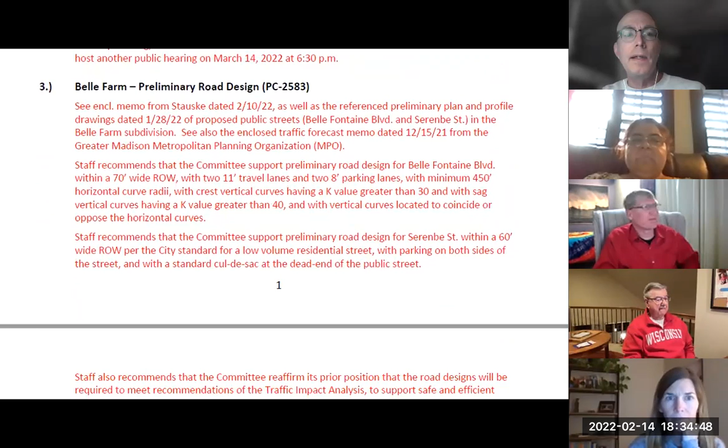So then we've got next up, Belle Farm, some discussion for the preliminary road design, and we have a preliminary road design, so that's good news. I see that we have the developer, Kathleen, is with us tonight. I don't see Kathleen, is Bruce here? Oh, there I see Bruce. Here I am, never mind. I was scanning the list and missed you, Bruce. Can you hear me okay? Yep, you're coming through just fine.

So you've all seen the drawings and you've seen my memo. I don't know if you want me to jump to anything. I have a few recommendations embedded in here, and we could talk about the roads one at a time. If there are any general questions, that would be fine too.

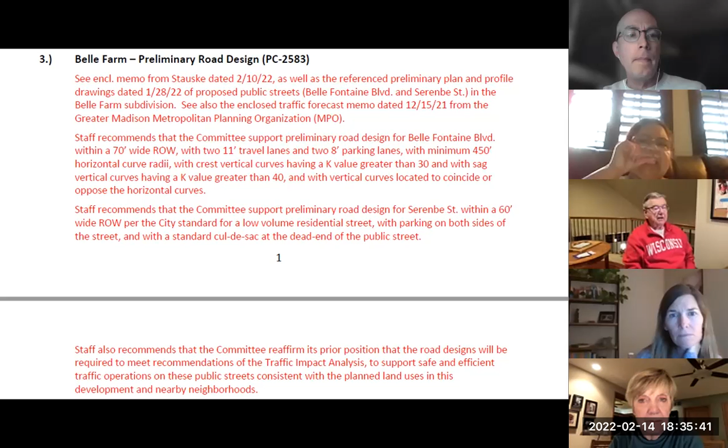All right, well, I think, Sean, do you want to maybe summarize what the design is with respect to Belle Fontaine first, and then we'll do Serenbe second, and then talk about the other question that you had raised as well. Sure.

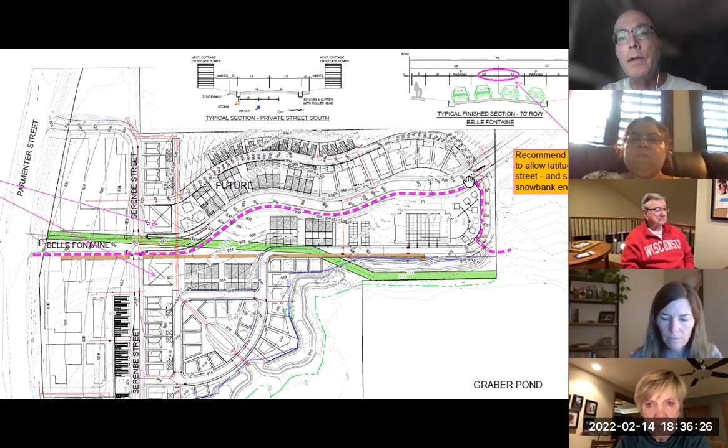I'm just trying to figure out, maybe I'll just stay here on this overview for a bit, even though it'd be nice to maybe be able to see it better. Let me try zooming in just a bit. Okay, well, you can see, if nothing else, on your screens this dashed purple line, that's the multi-use path that would be on the south edge of proposed Belle Fontaine Boulevard.

Susan, were you asking a question about this green line before the meeting started? That's the sanitary sewer interceptor that cuts through the site. And then it links up with one in Misty Valley? It's already there, this is just the easement. That's what I wanted to know. Okay, so the road design, maybe going down to a typical section for that would be a good way to start, if nothing else.

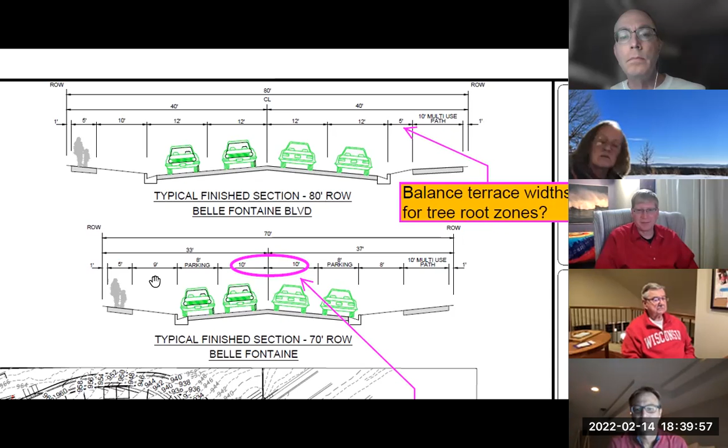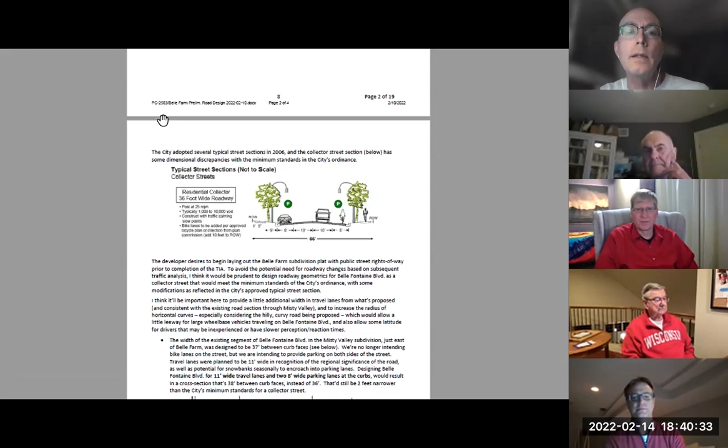My question is, in your memo, you say that the standard for a neighborhood collector street is 80 foot. Why are we doing 70? So there's the ordinance, 80 foot, and then there are 2 levels of planning documents that we have, and it confuses me too. We have an ordinance that's quite a bit older than what the city adopted for typical road sections. So the city's ordinance still refers to this older 80-foot right of way. Let me zoom in on this piece now.

So Sean, this would be more like the retail area in Middleton Hills, in terms of... I didn't look at that, to be honest with you.

So this is the 80-foot you're talking about, Carl, for a collector standard. It has this 40-foot width from face of curb to face of curb, or 36 feet of asphalt plus 2 feet plus 2 feet of the gutter itself. That roadway standard was also adopted in ordinance, but the council also adopted typical street cross sections, which are different than the ordinance. I don't know which controls, to be honest, but I think it's reasonable for what we're trying to do to say we can get 2 travel lanes, 2 parking lanes, a sidewalk, and a bike path in 70 feet. If we want bike lanes on the street, we'll need to add 10 feet, and then we'd be back up to 80 feet. This old standard in our ordinance really was based on 12-foot lanes, not 10s or 11s, and those extra feet make a difference.

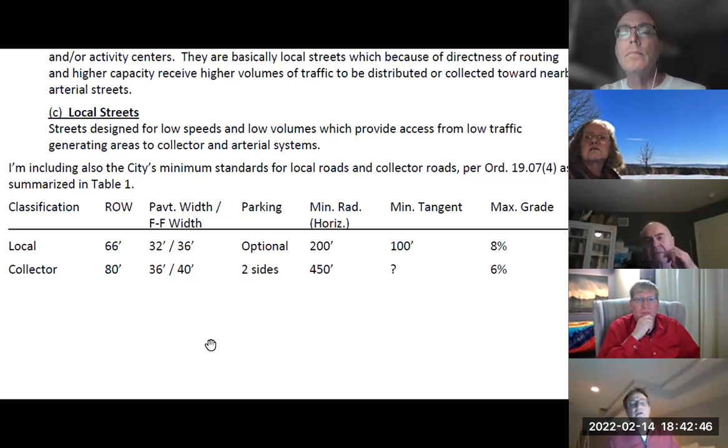What is the Misty Valley right of way? That's 125. And we've only built the north half of what's supposed to be a median-divided road. I was just concerned that it would at least be as wide as Misty Valley, or it would have a match. Misty Valley, if it was 80, we should make it 80, but I don't have an issue with that. Well, the actual street width is 37 feet face to face of the travel lanes in Misty Valley. But there's only one of the 2 streets that were planned that got built. Right, we're also thinking about not building the second one.

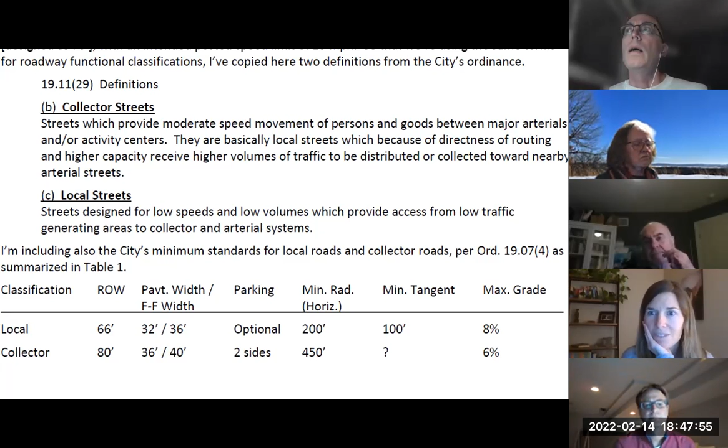I think in theory they can fit. We're coming from a background of having 12-foot lanes and trying to say let's go with 11-foot lanes. 10 is the narrowest lane we have, and it's really built for residential streets, not collector streets. And this is a very curvy, hilly layout of this road as well.

That's the thing - we don't have collector streets that are this hilly and curvy for me to point at and say it'd be like this. Because the kind of street this is, more like High Road, has several neighborhoods trying to use it, not just one neighborhood.

High Road's not hilly and curvy, it's got some hills. Sean, on High Road, when you put in the parking lanes and the bike lanes, the traffic slowed down - it was a big improvement in terms of traffic speed. I don't have a problem with 11 feet, but I wouldn't want to go to 12.

I'm not proposing that either, because as Kathleen rightly pointed out, we're trying to reach a balance on some of this stuff - recognize it for what it is, but also walk away from the historic design and try something a bit more in keeping with our goal of narrowing roads. The ordinance is a little outdated compared to the council approved cross sections.

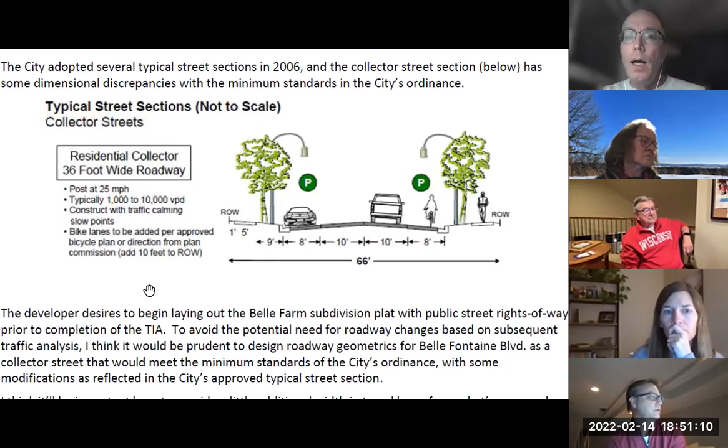We don't have a different cross-section for that, we just have this one thing called collector. So Sean, I think it said by 2050 an estimate of 4,000 vehicles per day from the MPO - is that right? Was I reading that right? So this says typically 1 to 10,000 VPD?

I think that's right, based on some assumptions they made that they were in that ballpark - I'm trying to find it now. Yeah, I'm looking at the MPO memo and it says 4,500. Yeah, and they refer to it as a 2-lane urban local road with a 26 mile per hour free flow speed.

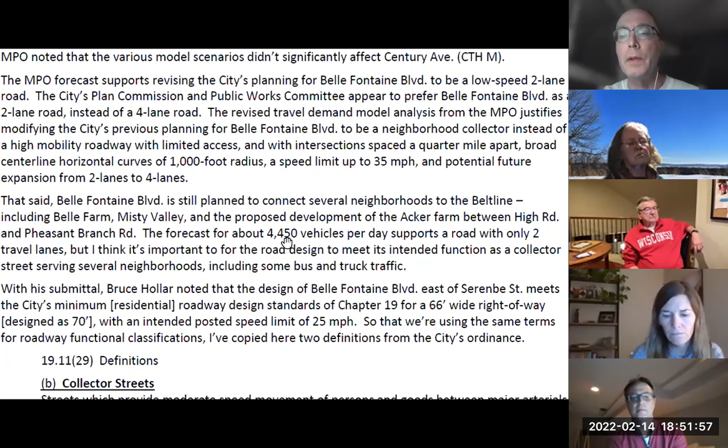So this is more than, say, the Collector Street Donna Drive, which also serves several neighborhoods and has about 3,000 vehicles a day on it, if you're familiar with that. What would Old Middleton have, about? I think that's lower, but I don't have a number in mind about that.

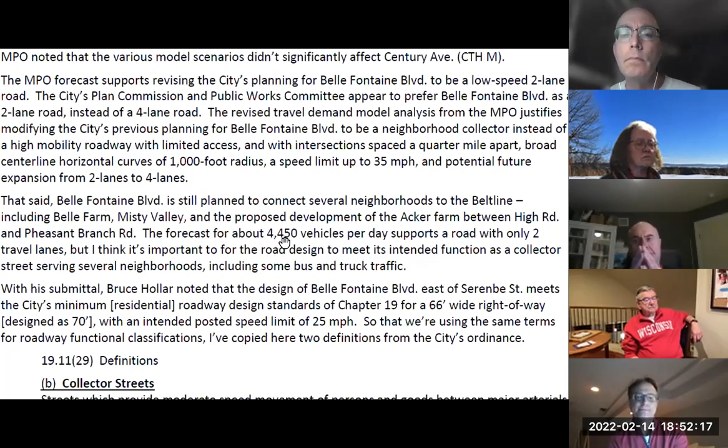So Sean, why does that cross section of the Collector Street show up to 10,000 vehicles per day? I don't know, the Plan Commission really picked most of this stuff.

John, was there any consideration to putting bike lanes in here as well? Because we definitely have a predilection toward putting bike lanes on all new streets. And this one, with the additional right-of-way and a bit of additional size with 11-foot lanes rather than 10-foot, might allow for bike lanes as well, might it not?

Well, we would normally, if we're going to stripe a bike lane, leave 5 feet for it. In this case, if we also want parking, we'd probably put the bike lane between parking and the travel lane, like what we did on Parmenter Street or on High Road. But I haven't heard the Public Works Committee or the Plan Commission advocate for bike lanes on this road. And I think our comprehensive plan says that on future collector and arterial roads we'll favor bike lanes.

On this one, I think the recognition was that this should tie into what we've already built through Misty Valley as a half section of road, and we'll reallocate space between those curb lines - in which case we're not going to get bike lanes through what's existing in Misty Valley, short of completely rebuilding it.

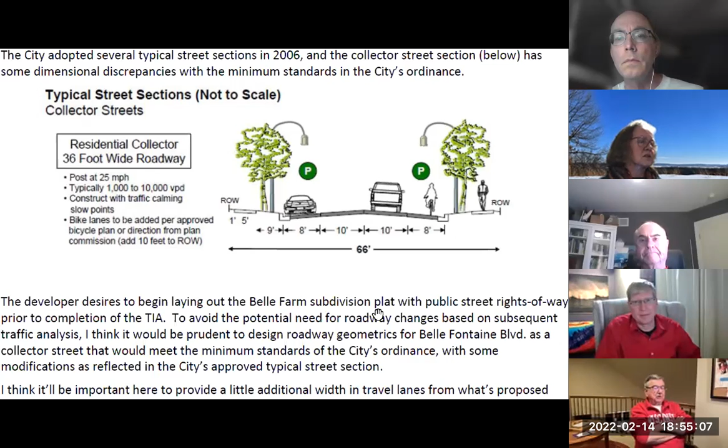All right. So on this road, part of what I was recommending also is to soften the degree of curves, both horizontal and vertical, the hills, the valleys, to smooth things out a little, to keep them, but not make them quite this pronounced.

And for that, I did go back to the city ordinance for a 450-foot standard. This is the plan view, turning right and turning left kind of curve. For the hills and valleys, I went to a different source and said the curve should be so and so pronounced if you're putting in a hill or a valley. And I think many of these already meet those standards. 1 and maybe 2 could use some massaging for that standard.

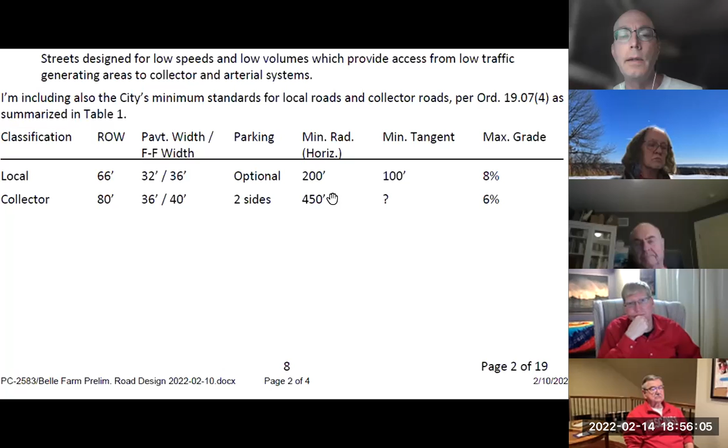So I don't know, Bruce, do you want to comment on that? And which one should we be referring to, Sean? The 450 foot for horizontal curves. Mhm, that's in our ordinance. That's the standard I went to for my recommendation on that.

Yeah, so on what I was using when I set this up, we made the assumption that this was going to be a local street with the intent of slowing traffic down, and trying to give it some character in the neighborhood as you come in if you're coming from Misty Valley, coming into the commercial area.

And the 450 feet, I remember laying a couple of those out early on, and it really restricted us, it almost becomes more of a, what it does is because it's straightening it out a little bit, you're then encouraging a little bit higher speeds, and it kind of takes away the character of the neighborhood. Now we know there's an area, can you bring the overall development sheet up? Yeah, let me get back to that.

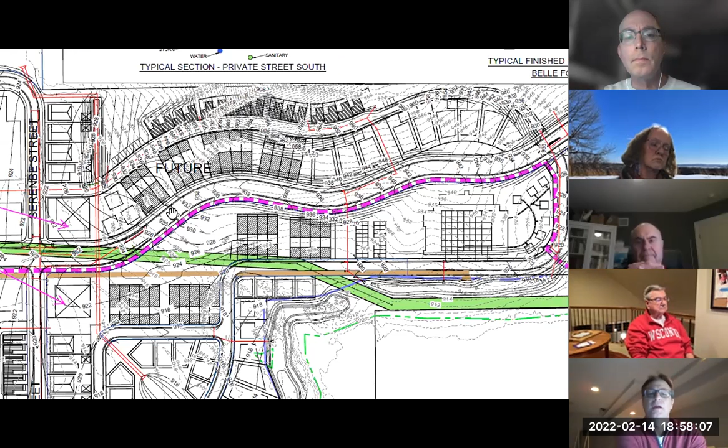Yeah, so that curve that's right underneath the word future, here, kind of in the middle there. Now that, to me, is a little smaller curve, and I think flattening that out to the 450, 500 or whatever, to pull that down, gives you a nice transition from where you're coming off of Belle Fontaine and heading east. As you drive that with the flatter radius curve, I agree, that will feel a little better as you're transitioning going east.

But the other ones to the east of that, where I have the red lines crossing right there, and then the next one further east, those are around 2 to 250 for the center line radius. And again, that's coming out of the residential neighborhood, with the goal to try to slow some traffic down as you're coming from the east, heading in towards the commercial and higher density areas.

Well, but again, I understand the viewpoint that we want to build a local road, but I think we need to recognize that we're building a road that needs to serve this neighborhood, Misty Valley, the Acker Farm, and future development even east of there. And they all want to get to Parmenter Street.

I think we've got a real opportunity here to be proactive with traffic calming instead of what Madison's doing, scrambling after the fact, because of the way the infrastructure and buildings are. Just today, the New York Times headline: pedestrian deaths spike in US as reckless driving surges. Headline after headline talks about this, and it's like, this is an opportunity right when we're first building it to put those measures in beforehand, instead of scrambling afterward.

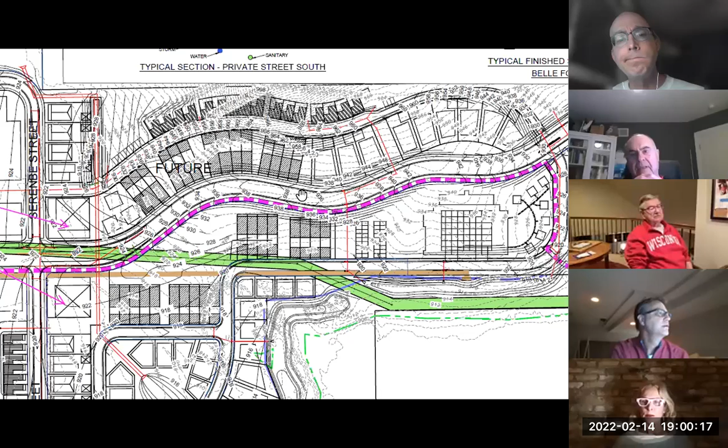We need to keep remembering that this is going to handle 4,500 cars a day. Right, it's not a local road.

Can I ask you this, Bruce, on these smaller degree of curvature, horizontal curves, what's the difference between 250 and 450? How much does that slide that in? Did you look at that? Yeah, I did.

So in the instance with these 200-foot curves, there's a requirement to have a 100-foot tangent section between the start of one curve and the end of another. If we use a 450-foot curve, we can ignore that and just go from one to the next. There's a lot more... it doesn't straighten it out as much.

When I'm trying to maintain a certain tangent section in addition to the wider, longer sweeping curves, that's when it kind of stretches out and becomes more of a straight street, as opposed to having a bit more character in it. Sure, but how far in did that come? Was it, do you remember? Like 3 feet or?

I don't know if you can allow me to share my screen, but I've got an instance of that 450-foot curve. That's a good question. Let me stop sharing this and try.

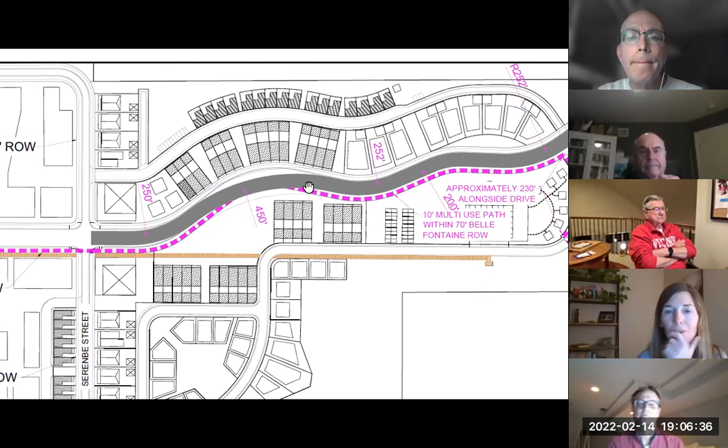One more comment. I think it would be great if we could refer to studies rather than just anecdotes, because time of day and other factors mean everyone has a different experience. I agree with you, Carl. I know what you're saying, but I've biked on Old Middleton Road with my family and it seemed very dangerous because of the higher speeds and people passing. Everyone's experience is different.

Yeah, and that's why, Carrie, everybody has their own opinion, right? That's why I went to the ordinance as my source and said here's why my recommendation is based on this number as opposed to any other number. That doesn't mean the city can't come up with something different than the ordinance. I'm absolutely open to that, but this is where I'm starting and why I'm starting with that recommendation.

So Bruce, you have this laid out in gray as a 450-foot radius. Yeah, as opposed to a 250.

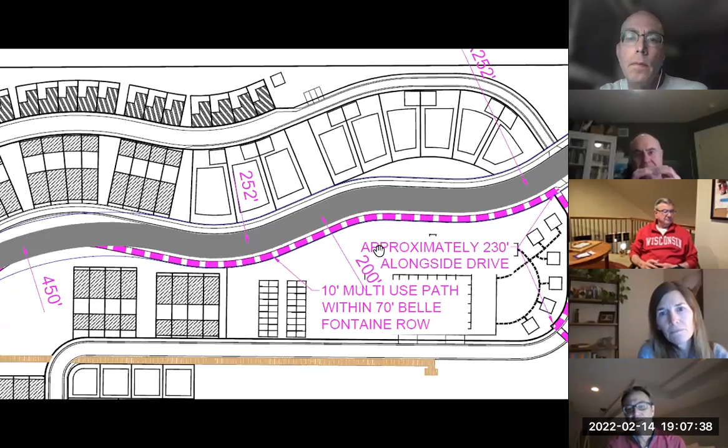Right, so that's a 37-foot wide street of pavement. So just to give you an idea, that's now a 450-foot curve, and you can see the differential there of what that does. Now if you head a little bit east, you'll see I've got some 250, 200-foot, and 252-foot radiuses there.

You can kind of see the little straight tangent sections between the curves. That was done to meet the ordinance. Now if by going with these larger radiuses we eliminate some of those tangent straight sections, it just flattens the curves out a little bit. And we can accommodate that.

Again, it's one of those things where we kind of lose some of the character, and flattening the curves tends to, I think, increase the likelihood of traffic moving faster through there. I think this would still have a lot of character though, and it would still be, by far, our curviest road per mile.

Now I guess one of my questions would be, do we eliminate that tangent section between curves and just allow them to go reverse back to back, reverse points? I noticed I could see cheating down on it a little, but I think going with reverse curves would be bad too, because as soon as you get done turning right, you're turning left. I think, especially with inexperienced drivers, that's going to be a problem. That's going to be a sore spot.

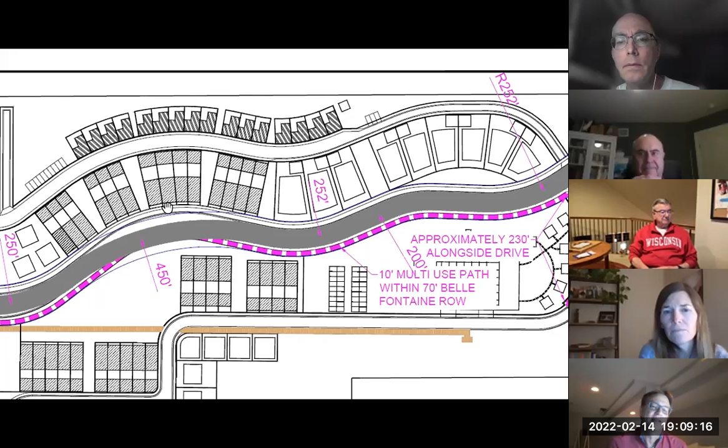Well, but I think the point of it being 450 is to allow for that maneuver to be sweeping and not so abrupt.

This is Robert. I tend to agree with Bruce on this. No matter what's happening, I don't care—I mean, I can't tell exactly where the curve ends and a very short straightaway starts before it reverses direction, but you're going to have hands on the wheel on this one, turning left, turning right, turning left, turning right, no matter what we do. So I'm not as concerned about dwindlingly small straightaways between these curves.

The one that seemed the tightest—and it was probably the least tight for all I know—is the one that Bruce has shown in this image as 450. It did seem like you were driving a little bit too much into those buildings to the north of the road on the tighter turn, and with a little bit more of a graceful, shallow turn...

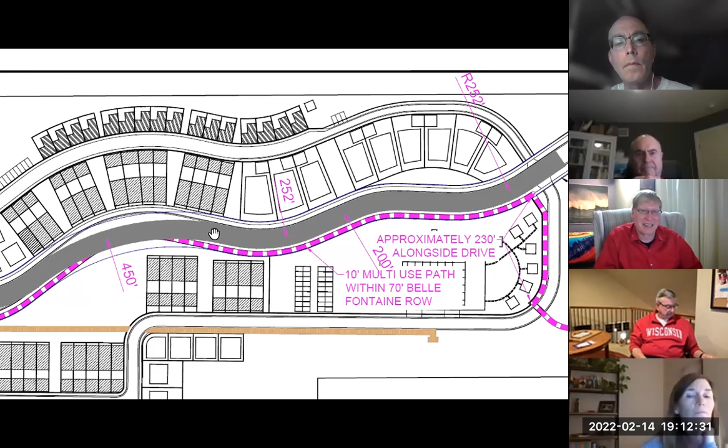I would personally think that one big bend that's listed as 450 probably should be more like the 450 that's shown in gray, rather than what was there before with the really sharp bend that seems like it takes the bike path and everything, wending it so far north that it just feels like you're running the risk of not making that turn and driving your car into a building, or obviously more parked cars if there's parked cars there.

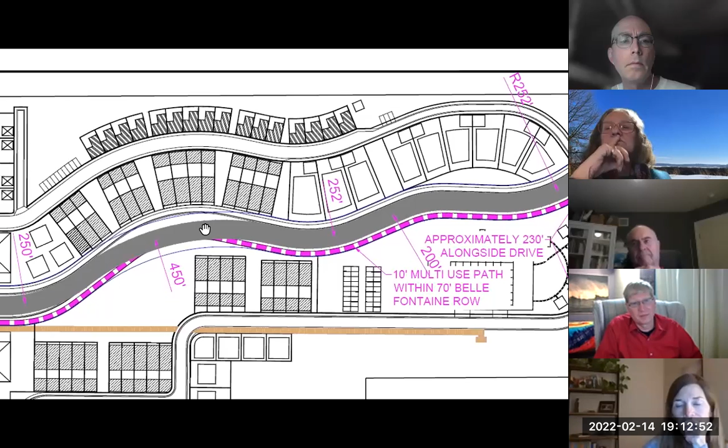So I have a question. What types of houses are there, just so I can get a feel for how many cars might be parked? And do they have garages themselves? Yeah, so all of those are all townhomes along there, and they're all accessed from the roads behind the houses. They have garages behind them, and nobody has a driveway onto Belle Fontaine.

So that helps tremendously, because unless they have guests, there are not going to be as many cars parked there, hopefully. Or if they're just running errands, they might park out front, run in, run out. But again, it's not like the Middleton Hills retail area that's always got parked cars on both sides. Right.

Yeah, and I think you especially recommended that all of the curves have the 450-foot radius. Is that correct? And to allow shortening the tangent section between curves, I'm hearing. Did you have any kind of a drawing that showed what that would look like here? How would that change the configuration of the road?

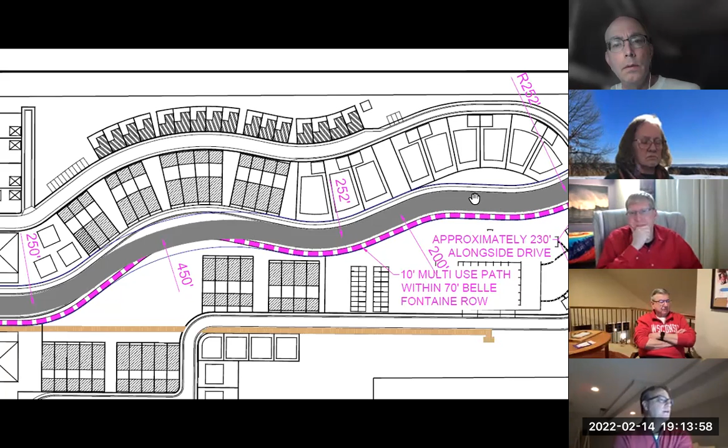I don't know that we have a great drawing until I get to the plan and profile. And even then, you kind of have to know what you're looking for, right? So one curve ends and 100 feet later the next curve begins. What Bruce is saying is, by flattening these curves, this point starts to move out a little bit, this point starts to move over a little bit, and you might have 50 feet between curves.

To put more length into the curve, you have to take length out of what's not the curve, if that makes sense. So you have a gentler curve, you just have a shorter distance between the curves.

I was just agreeing with what Robert was saying. Jim, go ahead. I was going to say the only other way to balance that is to turn these lines a little bit. So instead of being at this orientation, if it got rotated clockwise so that this point picked up and this point went down, then you can fit a broader curve in too, because the line you're tangent from is a little bit more in line with the curve you're about to enter.

So there's a different way to balance that, but shortening the tangent is the easy way to balance it, and then twisting that line would fine tune it maybe.

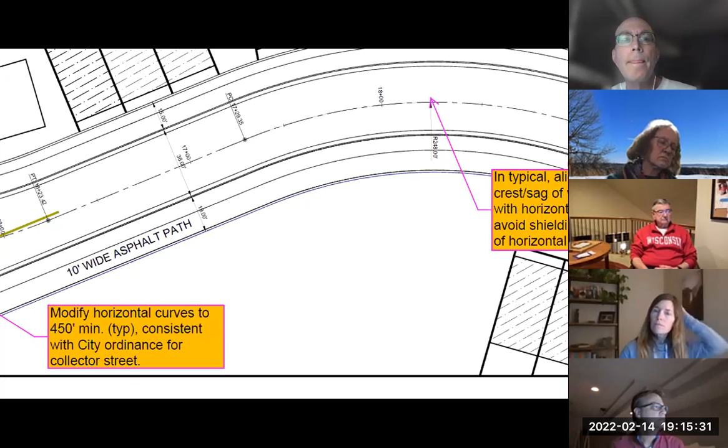Sean, as opposed to what you're saying, are you guys comfortable with the drawing that Bruce actually put up? Like if we fix that one, the big 450, do you feel strongly about those other ones having to be 450, or leaving them as they are and keeping the straightaways longer? I mean, would you be willing or open to passing this as it is?

Does it achieve what you're trying to do? I agree with Robert. I would, if like how Robert was saying, if that gray area is where that 450 is, how it kind of drops down.

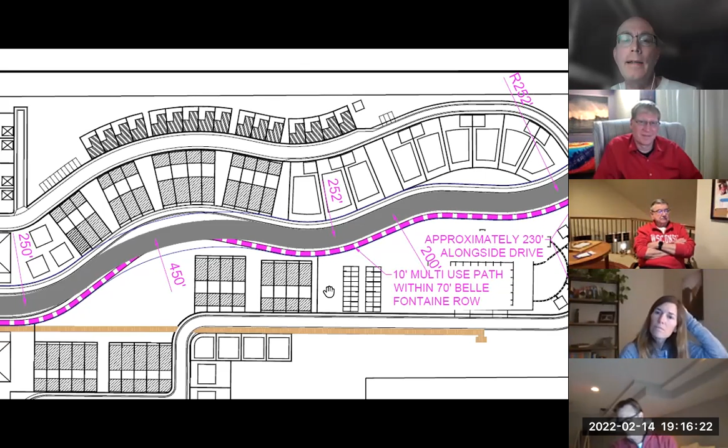John, what do you think? I would, well again, I'm trying to follow the ordinance as best I can and the guidance that the city council has given. I would prefer to see what it would look like with 450s, even if we have to shorten the tangent. How can we ignore the ordinance?

I think the city council would have to... it's just a guideline, right? Well, the committee can recommend to the council a waiver of the ordinance for whatever reason the committee wants.

What would the reason be here? I mean, you have a blank sheet of paper. You could draw this roadway any way you want, and it would be easy enough to draw it in conformity with the ordinance.

I think because we're trying to do something different, right? We're trying to make this road, put in some traffic calming features, address some of the stormwater issues we're talking about. We're trying to make this different. So I think that's where we would make exceptions.

I would also point to the comprehensive plan, as well as all the goals you guys have in it regarding narrower streets and traffic calming measures. So it's not like this is coming out of the blue. I took your comprehensive plan as like a Bible when we were looking at this. I was so impressed and inspired by it.

And so, the plan had this road 4-lane all the way through, did it not? That's not what the comprehensive plan had.

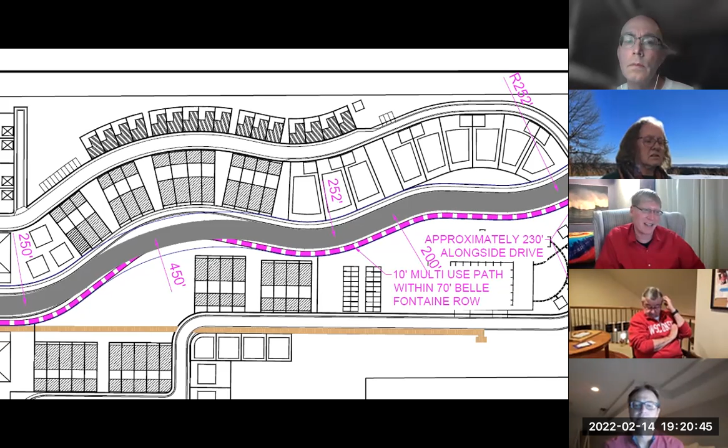I think there might be, sure, we might be able to ask, maybe not a high detailed map, but something that shows overlaid on this what a 450-foot radius curve looks like in some of these other areas. And assuming that you don't have to have 100-foot straightaways in between them, that might not change the way the road moves much at all, except at this one big bend.

I think obviously going to 450 really smooths that out. In the other areas you won't see much of a difference. It'll just, as Sean stated, the curves will just smooth out a little bit.

And I think, if you have to tweak the tangent sections a little bit, Bruce, it should be fine tuning, that would come out in the wash. But if you have to shorten up tangents to 50 feet instead of 100, I think I'm hearing mostly committee support for that.

And how do we want to proceed on this question this evening? Because we should move on here too. Are there any other questions, Bruce, with what I had marked up and offered as staff recommendations besides these horizontal curves and the lane widths?

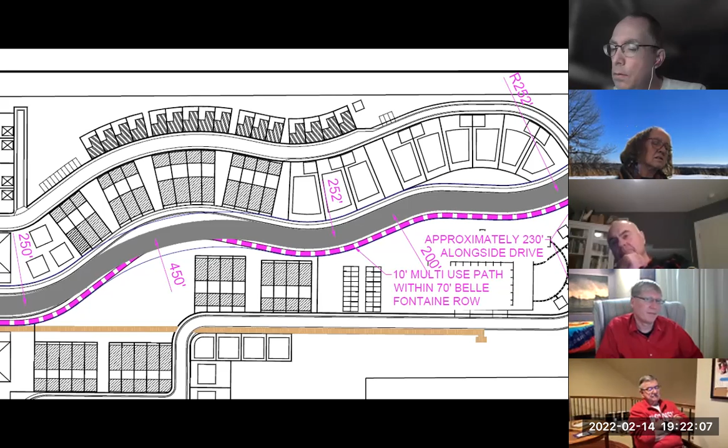Well, what's going to help me out, I think, on the vertical curvature, the K values felt a little excessive because of the speed itself.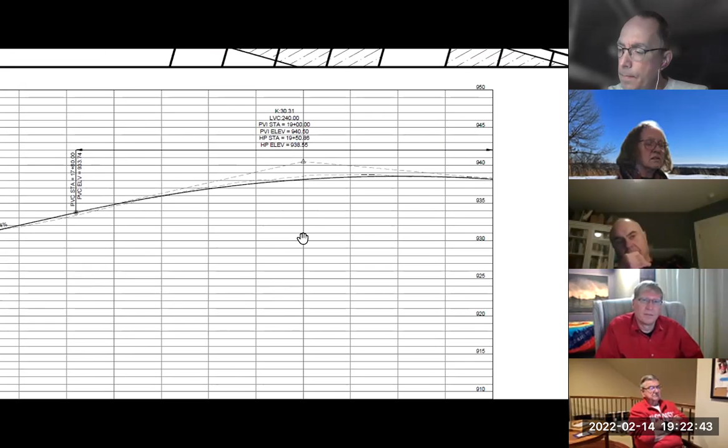Typically at the high points and low points, the K value of 40 - what I'm trying to do, in addition to the horizontal curves, is utilize the terrain as best we can with minimal disturbance. These K values kind of fight against that, because we're flattening hills and valleys when I'm trying to match the terrain without cutting or filling too much.

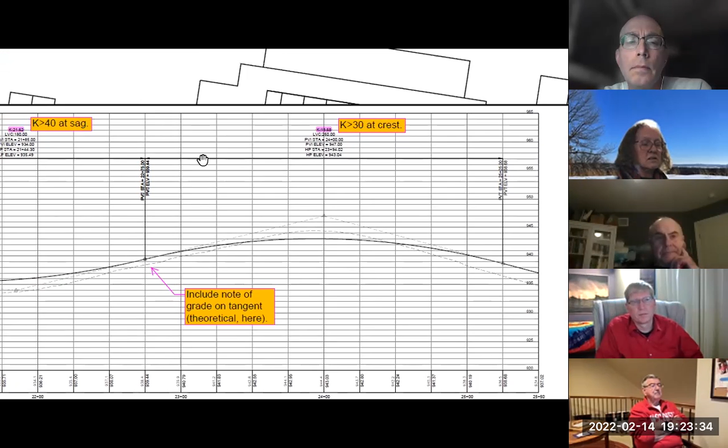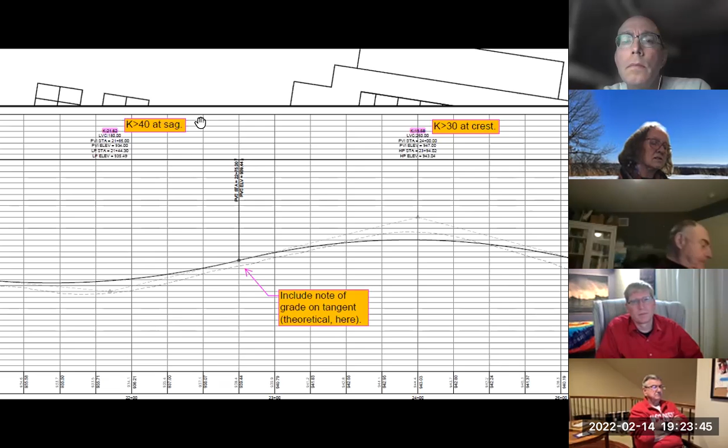Because generally the K values are related to sight distance, and at these 25-mile-an-hour speeds, or design speed of 30, I think a K value of 30, and sometimes even 20 at the sags - we've done that on local streets, which are typically the 25-mile-an-hour ones. So that's my only other thing regarding the Belle Farm recommendations.

Did you have a different source for K values? I was looking at AASHTO's design guidance and the WISDOT FDM, but wasn't going based on other design guidance. No, mine was just based on other communities I've worked in, like Madison, Mount Horeb, Oregon, DeForest - some of their guidelines that they use.

Could you send those to me? Sure. Because I don't think we have any published standards - we've just been using the other published standards. But if you send those to me, I'd take a look at them. Sure.

I thought that's what AASHTO and WISDOT did, was looked at stopping sight distance. I mean, they have a different one for passing sight distance, but that's not applicable here. Right, right.

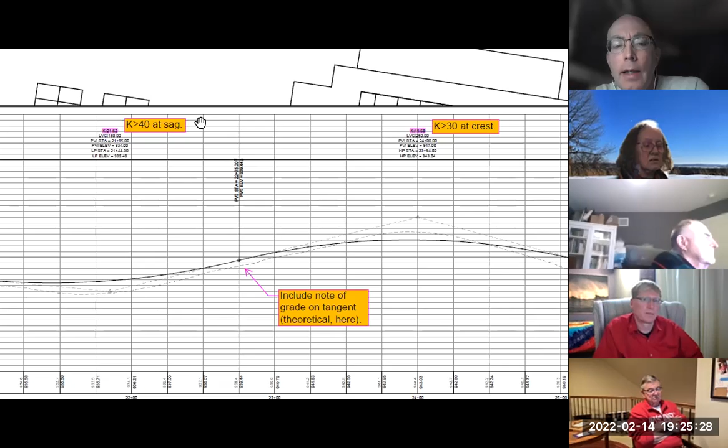And the only other thing that's hard is the MPO talks about us designing this as a 38-foot wide street, which is kind of a mix between the collector and the local. So that's where I'm looking at - well, what is it trying to do, and not where is it, but what's it serving?

So my only other thing related to the vertical curve portion would be the 6% max for the grade. And again, that goes back to me trying to work with the terrain I'm dealing with out there. I think I have one instance where I'm at 6.65%, just over 6. So if there's a little bit of leeway there, I'd be looking for that too.

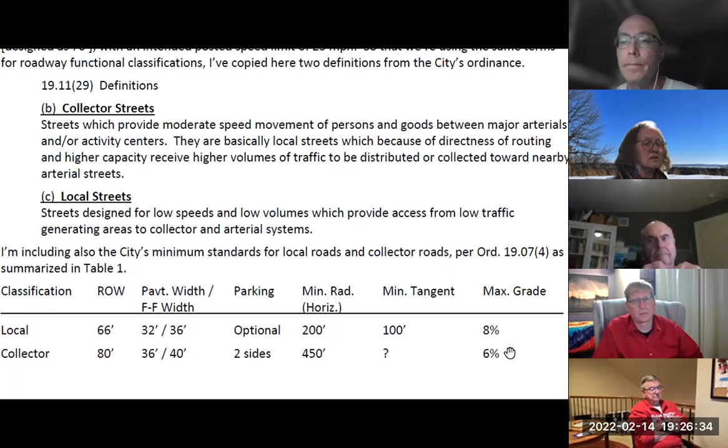But yeah, I don't know what the committee thinks about that. I think the balance is how much you're working with natural topography versus how much we're trying to figure out long-term, how to best make this usable for pedestrians who may have mobility issues. So 6 is obviously a number pulled out of the air - 6.65, maybe that's doable, 5 would be better. So I don't know that there's a right answer for that.

It's a number that we published in our ordinance that says nothing works quite right all the time, right? Parmenter is obviously way beyond 6% as hills go, but it's also harder for some people to use because of it.

So does the committee care if that stays at 6.5, 6.65? I wouldn't try to have it everywhere - 6 up and 6 down and 6.65. But if it's just a little area where it goes a little over that 6%, it's still less than the 8% for local, and it sounds like we're kind of straddling those two things anyway. So a little over 6%, I think, is fine. Where we can flatten things down a little bit, great. But I feel like going a little over that 6% limit, which is an arbitrary number, is acceptable.

Well, the ordinance is there for some reason, I presume, and I'm not all that comfortable just saying we should ignore the ordinances. If the council wants to redo the ordinance and put some more flexibility in for those things, that's their right to do. But they've given us these guidelines to work with, and I'm not too comfortable ignoring them because we've got a piece of topography that doesn't fit the ordinance.

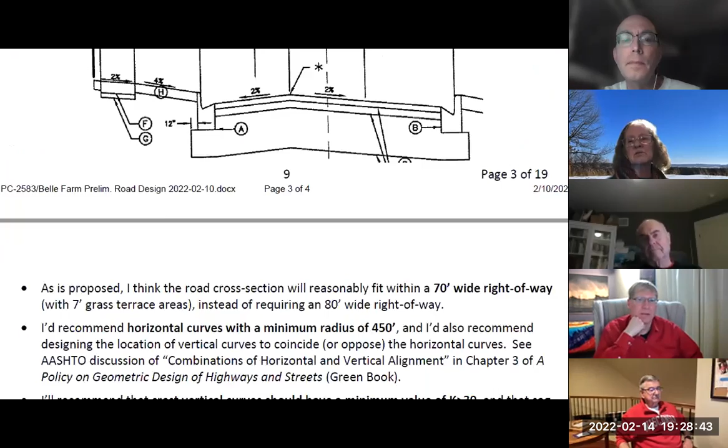Sean, when were the ordinances written or approved by council? I don't know - I don't remember any time since I've been on council dealing with that issue, which makes it over 14 years, in terms of our current desire now to get more traffic calming. Right, well, this isn't a traffic calming thing though, this is a working with the topography thing. Yeah.

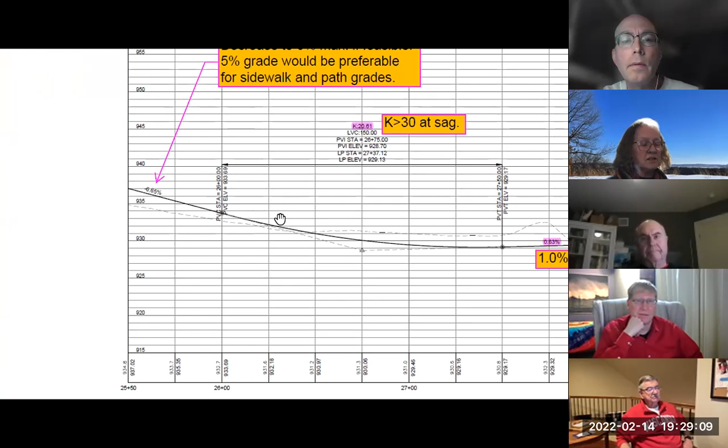But what I'm suggesting is maybe these need to be looked at and updated with some of our current goals in terms of dealing with traffic, because I know the opinion has changed in that time period.

Well, that's fine, but in the meantime, ADA said 5% is really our target maximum. But the city ordinance still says 6%. I don't necessarily think that's our responsibility to do. If the council wants to undertake that, they certainly can undertake that.

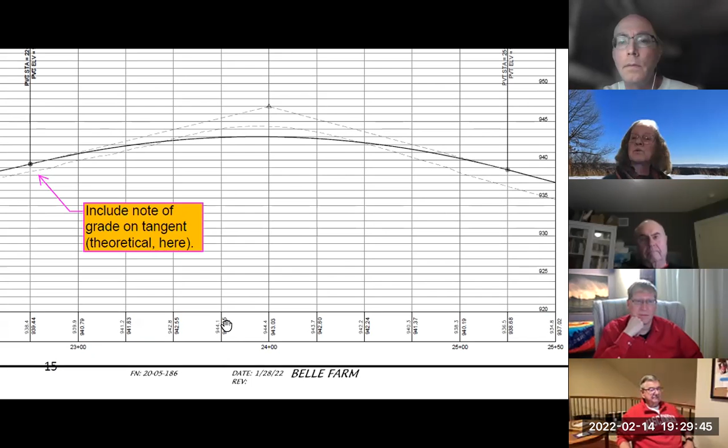I would agree with you on that, except it's never been brought to council for us to even think about it. So I think we need to maybe have them think about it in terms of the kinds of neighborhoods and so on.

That's fine, but I don't know that you're going to get those ordinances rewritten in time to have much meaningful impact on this particular project. No, you're right. We need to make a decision on this project today.

I think we each know where we probably stand on it, and just have to have a vote and see what our recommendation is to council. All right, I think that's a good idea. Robert, do you have a motion you wish to offer?

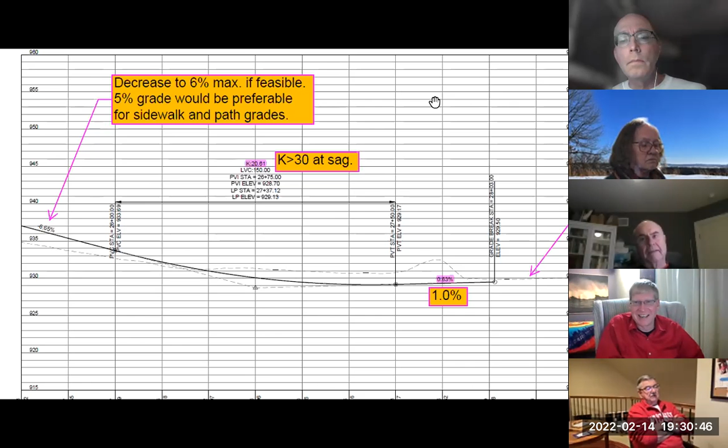Well, because we broke this up, I'm not sure how to even make my motion. Are we just talking about vertical K values right now? Are we talking about the entire project? Everything that had to do with Belle Fontaine Drive.

And then we'll do Serenbe Street after that. Is there, I would say, if we could work in the right-of-way width, and I'm recommending 70 feet, the design is recommending 70 feet. I doubt if that's controversial. Right, let's take this one step at a time.

My motion would encompass a 70-foot right of way, and would also include 11-foot lanes for the two travel lanes, 8-foot parking lanes, one on each side.

450-foot radius curves. And we talked about narrowing or shortening the runout tangent length from 100 to 50. We also talked about them just seeing what that would look like first and then voting on that.

So could we pull that out of the motion or not? I don't know, I think it would have to come back to the committee when we're looking at it. So if we're trying to give design guidance, yeah, I think so too, is if we see something come back to us, we can tweak it 2 weeks from now or whenever.

But I want to give at least a fairly clear direction on this motion. So yes, this would be the preliminary design too, correct? Sure. Part of my motion is the 450, with an acceptable shortening of the tangent, yes, they can shorten up that.

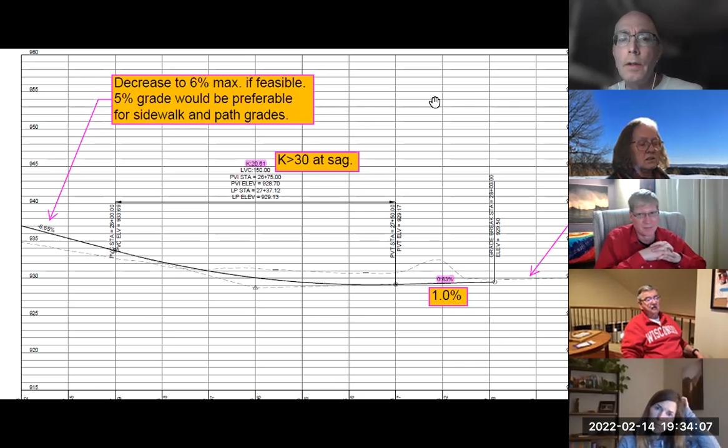Okay, and anything about the vertical curves? I didn't hear in your motion if you have guidance to suggest about following the national standards as I'm recommending, or some other standards that Bruce is going to provide. I don't understand those standards well enough to put it into my motion, so either help me put something into my motion or...

Oh, okay. We talked about 6% grade and 6.65%. And are either of those tied in with the curvature you're talking about, or is that completely different? They are a little bit connected to each other.

So there's the length of curve, whether we're fitting it into 150 feet or 20 feet, right? How fast are we sweeping this change of grade?

So here, for instance, we're going at 1%, and then we're coming out of a curve at 6.65%. In between, over that 150 feet, we're changing grade by 5.65% - or maybe this is -1, I'm not sure. Whatever, let's say this is going uphill at 1 and this is going uphill at 6.65. So we're changing the algebraic difference of 5.65% grade, and when we do it over 150 feet, when you divide those numbers, it should come out to 20.61. So it's just a mathematical expression that says how fast we're changing grade over how big a distance. And the bigger this K value is, it means basically this is a flatter curve, spread out over a longer distance.

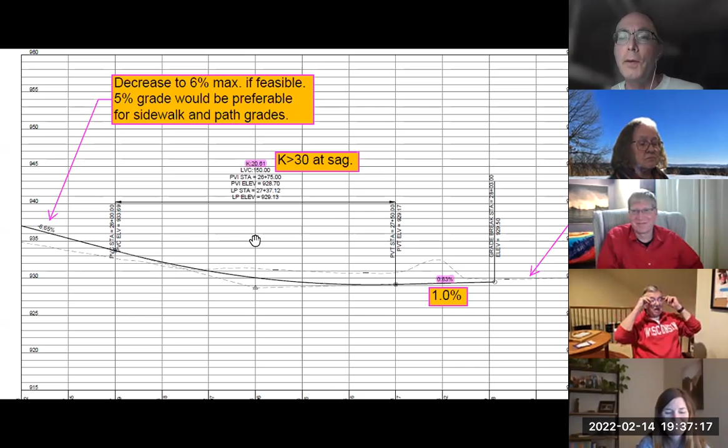I think I understand the elements of it. The next question would be, is there a second to the motion? This is Carl, I'll second it. All right, we have a motion and a second. Is there any further discussion with respect to the motion? Does everybody understand it? I think so.

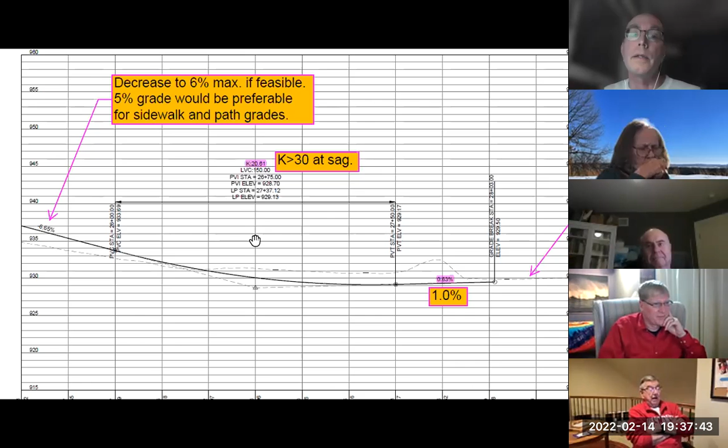I just wanted to confirm, so this drawing will come back to us - we'll look at this again, correct? Yes, this is preliminary, the whole thing is preliminary here. We'll look at this probably several times more before it's finalized. Okay, thanks. Any other discussion?

Hearing none, those in favor of the motion signify by saying aye. Aye. Those opposed, nay. The ayes have it, and we can proceed on that part of the equation anyway.

And now we should move on to the other street. And I want to just confirm, but I am no longer seeing Gayatri. She left earlier. Okay, so I'm not recording her as voting on this. But I heard unanimity of the other 5 members, so we've not lost a quorum. That's good news.

So the other one is Serenbe Street, and so the cross section here - this is the road that goes mostly north-south parallel to Parmenter Street.

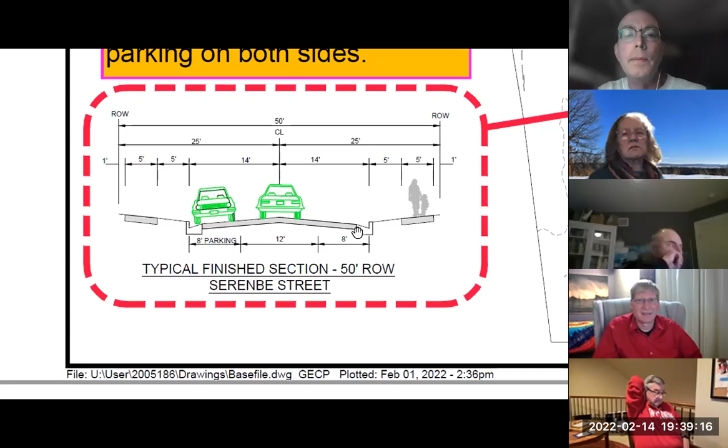It's proposing 2 parking lanes, and this is two-way traffic that just shares a lane. But if it's not parked full of cars, it's not just 12 feet, it's sort of in the ballpark of 20 feet - or I guess you wouldn't drive in the gutter ordinarily - so 18 feet in which you can sort of pass each other. And that's not consistent with the ordinance, but again, it is consistent with one of the city standards that the city adopted.

I think what I was noticing though is that the city standard doesn't have 5-foot terraces. It actually fits this road cross section into a 60-foot right of way in the city standards, the typical details for this. You have a copy of that typical detail? I don't remember if I copied it back into this memo or not.

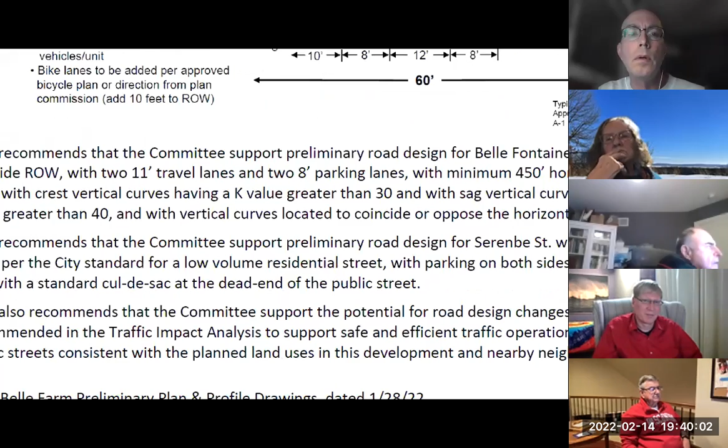So the last time we were in front of Public Works, we talked about Serenbe and that 28-foot wide cross section right here. Our goal was to maintain a 50-foot wide right of way as shown in that original one, which initially was to have a 28-foot wide street, but then have those narrower terrace areas or those green areas.

And as we went through the discussion, we were like, okay, in that narrow of a corridor, I recall the consensus was let's try to maintain the additional green space, and utilize the 20-foot wide street with parking - with a 12 and the 8 for a 20-foot wide street - and then just have parking on one side, or parking on neither side up towards that intersection.

So we proceeded to draw our line work and cross sections for Serenbe with a 50-foot right of way with a 20-foot wide street to maintain the green space for the tree growth.

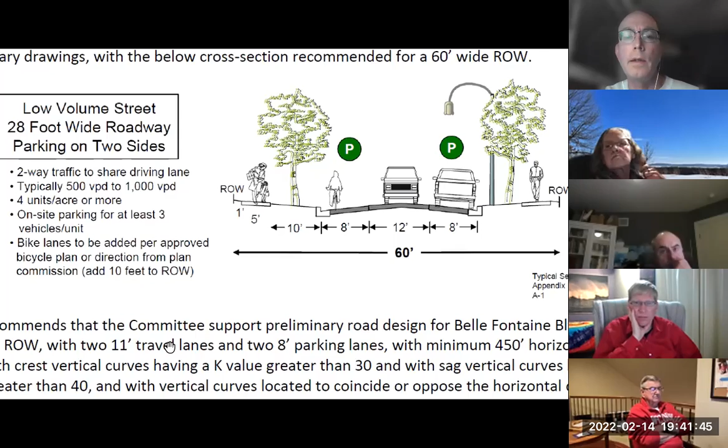So you want parking just on one side? We want, what we're requesting is a 20-foot wide street with parking on one side. Okay, so I misunderstood your cross-section in the plans then, that showed parking on both sides.

Well, where you have 8 foot and 8 foot and 12 foot, but you don't want a 28-foot road and a 50-foot right of way. You want a 20-foot road in a 50-foot right of way, like this 8 feet that goes away and becomes grass.

Yeah, so this cross section was presented prior, at the last public works meeting we were at. And as we discussed the street, the consensus from the committee was we'd rather have the green space to allow for proper tree growth, and give up some of the street width or the hardscape, and then just allow parking on one side. So this was kind of a carryover that I brought forward, but what we're proposing is a 20-foot wide street within the 50-foot right of way.

And I'm going to jump on for a second too, to make sure everybody's clear as to how we're looking at Serenbe Street. So we've worked really hard to make sure the multi-family traffic doesn't come onto Serenbe Street. They have their other access points to pull into the development and then pull right into their underground parking, with just a couple of exceptions.

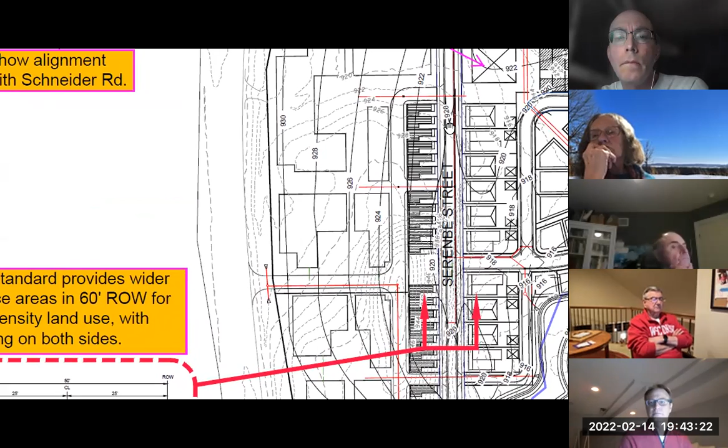And in terms of that, again, all the housing that lines Serenbe Street has their parking in their garages behind them, so there's none of that as well. So again, we've really worked through the flow of a lot of things, and we don't see this as being like a big thoroughfare. We've specifically designed to avoid that.

Yeah, and I think this committee was reasonably supportive of that. I just misunderstood that this graphic was showing parking on both sides, and that wouldn't work for what we were trying to do. But if you want parking on one side, the city has a standard for a 20-foot wide street in a 50-foot right of way with parking on one side.

It suggests that it's applicable to land uses adjacent to it that have a density of less than 4 per acre, which I don't think we do. But I think you could make a case to the Plan Commission, who would weigh in on something like that, that this would be sort of a minor access because you've got other street access and internal access, and maybe wouldn't have any particular use for on-street parking on Serenbe. I think a case could be made for that.

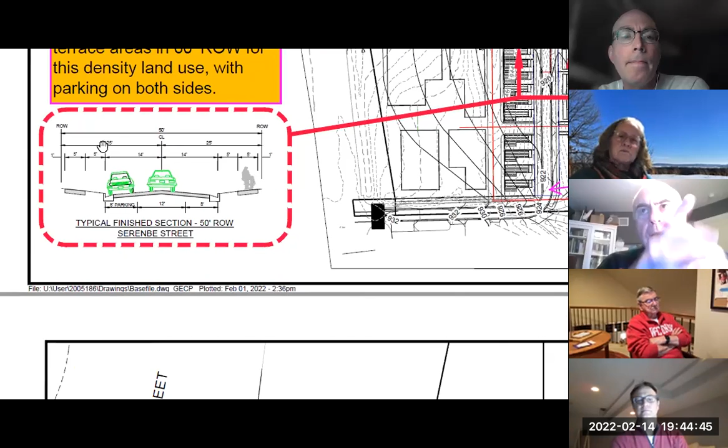This has a terrace design of 5 feet wide. Didn't we talk about... that's not current policy? Yes. But this is not the right cross section, it turns out.

What Bruce has just said is that this 8 feet of blacktop would go away and get converted to grass, to widen these terraces. You'd have 9 feet on each side instead of 5. Okay, all right, good.

Yeah, that's what we all talked about last time, that this all came before us, and I still agree that should be acceptable. So yeah, this is the wrong cross section to show here, but as long as we make it very clear that what we are approving is a 20-foot wide street cross section on a 50-foot wide right of way, with parking on only one side.

My motion would be to approve this construction of Serenbe. And the other thing that I've continued to recommend is that the dead end of a public street should have a turnaround.

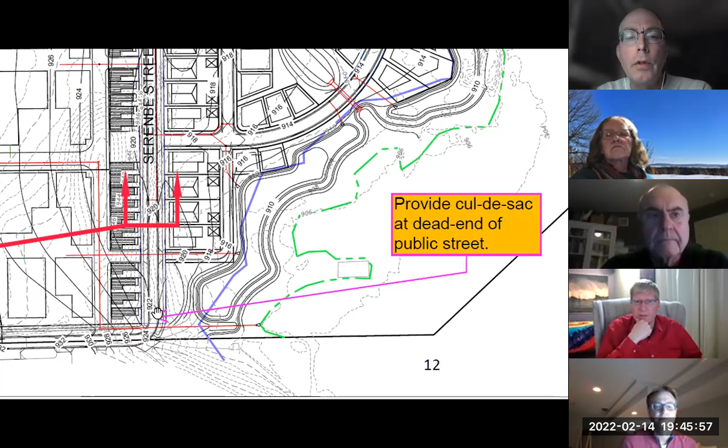If both of us gave our portion to the city for public use—and I don't know yet, I've reached out to them to understand if they're even interested—but if Springton became a public road, would that allow us to avoid the cul-de-sac? If it doesn't become a public road, then we know we have to have the cul-de-sac. I'm curious what the committee thinks, or Sean, what do you think?

I think the city would be open to that, in lieu of this just being a private shared driveway, to it becoming an extension of what we're willing to accept as a public street. Why not bring it out to a public street?

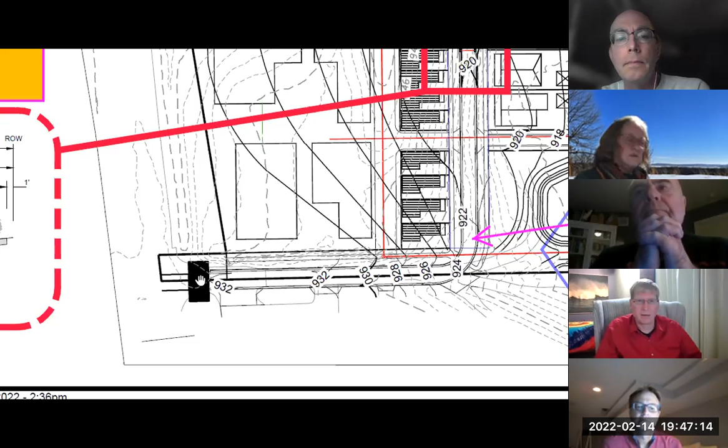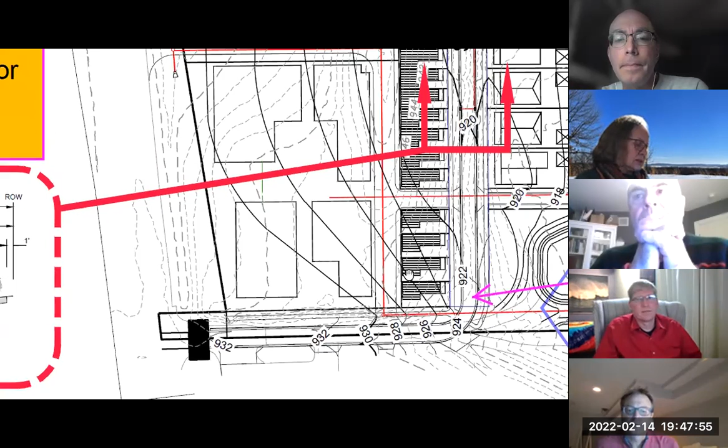So yeah, that could be a street, I think. So Sean, I'll work on that. And if we can't make progress on that, then we will show that as a cul-de-sac at the end.

So I'll start to make a motion on Serenbe: a 20-foot road width, 50-foot right of way, parking on one side. And then I'll add to that, to put in a cul-de-sac at the end there. That's obviously subject to change if things change about Springton Drive, or whatever it's called.

I would second that. All right, we have a motion and a second. Is there any discussion with respect to the motion? Hearing none, all those in favor signify by saying aye. Aye. Opposed, nay. The ayes have it, and we will proceed accordingly.

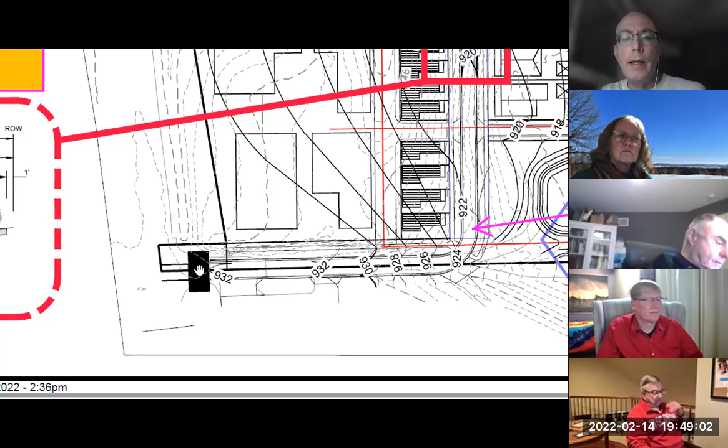But I do want to throw that back out there so everybody hears it—whether or not the committee wants to reaffirm that in a motion, or just let it ride from a previous motion, doesn't matter to me. I think it would be a good idea to reaffirm it so we have current minutes. I agree. I'd make a motion that this is all subject to—we're giving direction, but this is all subject to approval of a TIA, I guess. The TIA may recommend changes to what we have recommended.

I'm not quite sure how to phrase that, but the TIA may offer new information that requires this to change a bit. Hopefully not much. But I think, yeah, okay—TIA, so whatever that motion is.

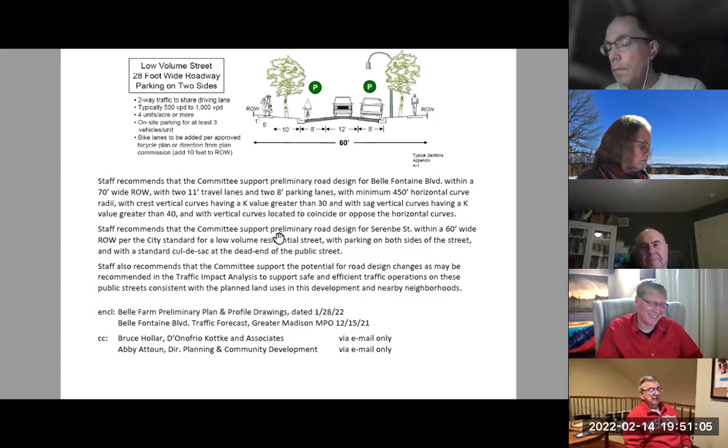All right, is there a second to that motion? Carl, I'll second it. Thank you, we have a motion and a second. Any further discussion with respect to the TIA? Hearing none, those in favor of the motion signify by saying aye. Aye. Those opposed, nay. The ayes have it.

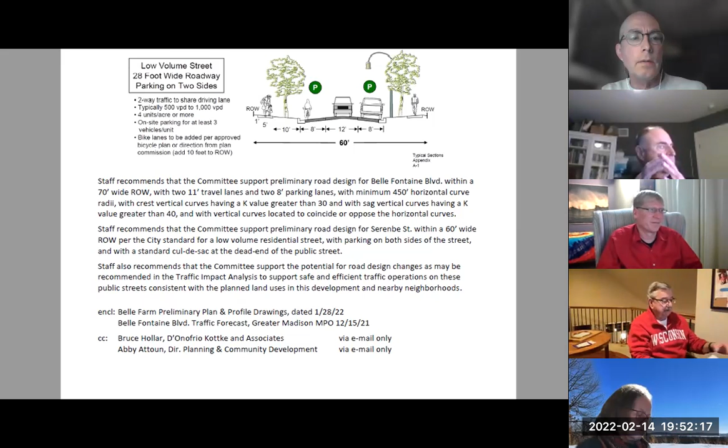Okay, next up is a proposal for parking changes along part of Deming Way, in Greenway Station. I see that Roxanne and Steve are both here tonight, so you can unmute yourselves.

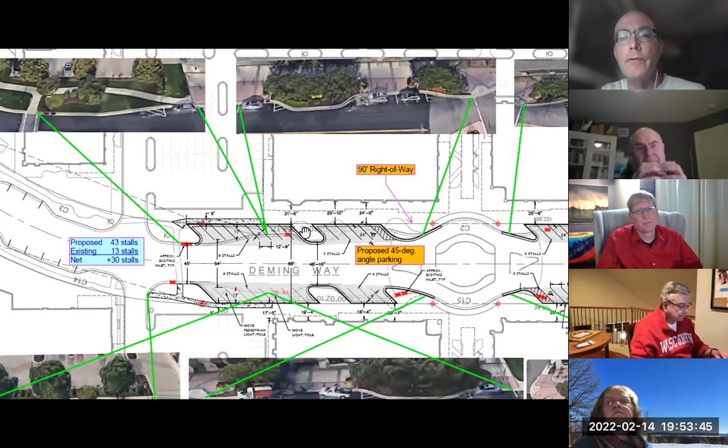The idea is to convert some of that to 45-degree angle parking on the street instead. I counted that it's proposing 43 stalls. There are existing 13 stalls, so there would be a net gain of 30 stalls with this proposal.

The right-of-way line is shown as a thin black line here, and the proposed curb would go from right-of-way to right-of-way, in essence. You can see pretty clearly where the existing business driveways are to their back parking, both north and south of where this proposal is.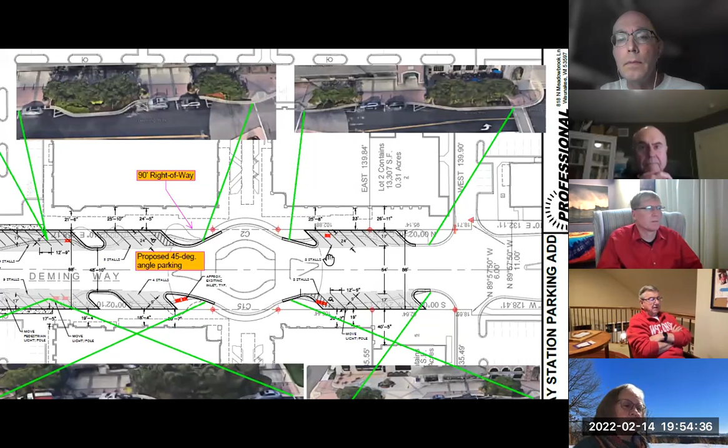This is Robert. Did you say that this would entail some type of need to change something underground as well?

Well, there's storm sewer. You see these red dots here and there, those are storm sewer inlets. They'd have to move. They're not going to be in the middle of a parking spot. I think street lighting and conductors would also have to be relocated, but we're not at that stage of design yet. That would all be part of this road reconstruction. I think we're looking at a fair amount of work.

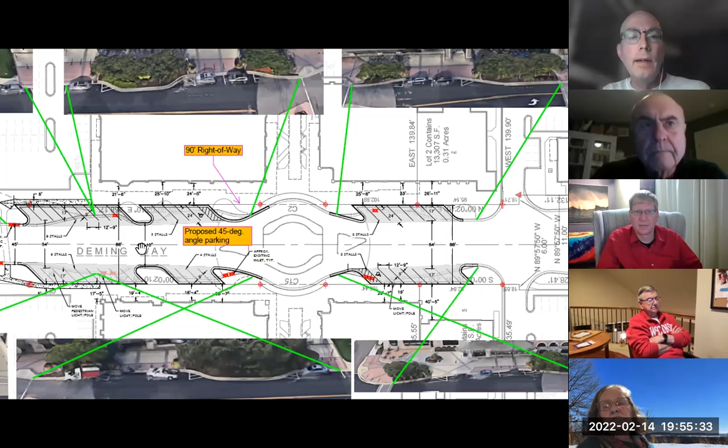One of my other thoughts was, if we want to do this, we have a fair amount of pavement width here. Let me zoom in a bit so you can read the dimension Roxanne provided - sorry if that made you dizzy. It's 54 feet for effectively two-way traffic. So these are really wide travel lanes.

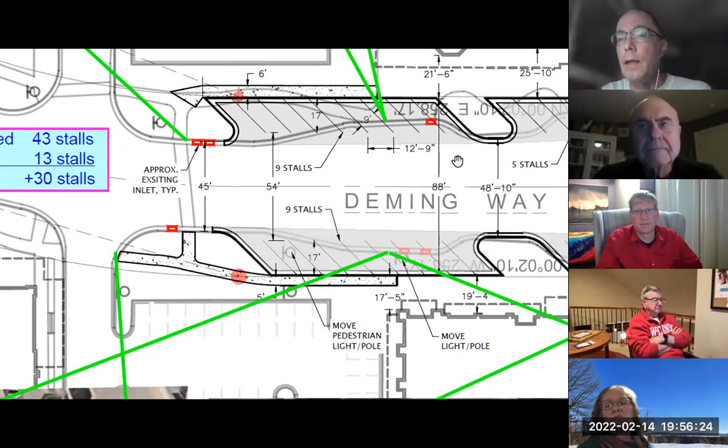There may be, obviously when we're approaching these driveways, we want to get a 3-lane section in here, so we have a little bit of a striped left turn lane out of the through traffic. While we want that to be 3 lanes, over here it really could be 2 lanes. There may be an opportunity to redo the geometry and pull some of this angle parking away from the sidewalk if it gets to design. This is just a concept right now.

So Sean, would the city be paying for this reconstruction? I don't think the city would pay for this. I think the developer or whomever is requesting it would end up paying for it. So if they're paying for it, it's not a big issue for the city. Well, I'm not saying that - in terms of cost, I would not see that. I doubt the city would be supportive of that. Yeah, that's what I'm thinking.

Sean, was this scheduled to be under maintenance of any kind? Is that why this is coming up, or is it just because of the parking issue? I'll let Steve address that.

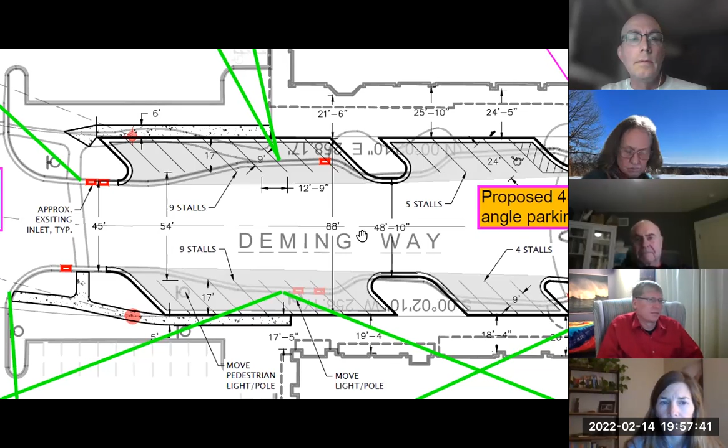Okay, thanks. My name is Steve Dorn. I'm with Galway Companies, and we were brought in to take over management, leasing, and try to turn this property around in November of last year. About 50% of those inline buildings along Deming Way are vacant right now. Over the last year, we've interviewed past tenants, prospective tenants, and retail tenants we are trying very hard to get into the building. Overwhelmingly, the biggest concern we get from tenants is, Steve, there's parking there, but it's not in front of the storefront.

So you then need to figure out a way to turn those storefronts around to face the parking, or get parking in front of the storefronts, because we're not going to lease space in a shopping center where there's 13 parking stalls to be shared among all those tenants, when in the middle of the winter, people don't want to walk that far.

We are wanting to reinvest in Greenway Station and make sure that it stays a thriving retail center. We have tenants that are interested in being in the shopping center if we can figure out the parking situation. We've floated this concept by a few retailers we're talking to, and have been able to save interest and save deals that were dying on the vine.

So again, we're not saying there's not adequate parking in the whole shopping center as a whole. It's just not accessible for these retail spaces.

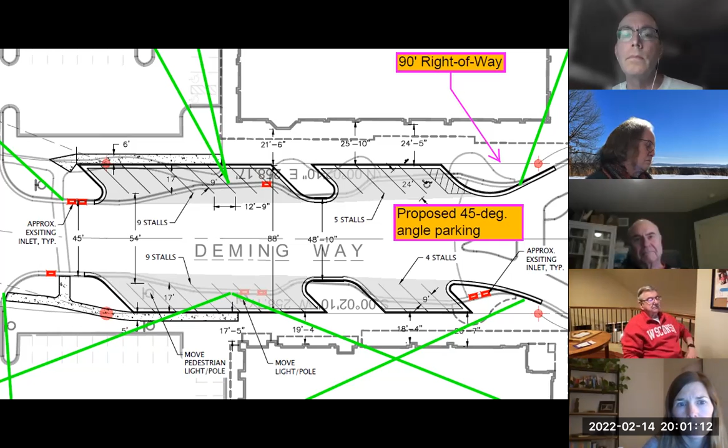Yeah, it's a public road. Our understanding was that the city does maintain the road and the parking along the road. Now the ownership group does maintain the fountain and all the landscaping in the roundabout. We reached a license agreement on that going, I don't know, 5 years ago-ish.

Well, if you make the roadway narrower to accommodate the parking, then you have the issue of people backing out kind of blind into the more narrow roadway with all the distractions right there for drivers, in terms of the centerpiece with the fountain, the Christmas tree, the pumpkin tree, and all the storefronts. It seems to me that creates a bit of a safety problem. You can't, if you're angle parked like that, back out of that with all the pedestrians around and all the distractions drivers have, without creating a rather unsafe situation.

Sean, there's other situations in Middleton, I believe, where there's angled parking like this. Have there been other issues with those angled parking stalls? Because I believe there's a few downtown where they're in front of retail storefronts as well.

On Elmwood Avenue, it's a very different setup than this. We have some angle parking on the section between, say, North High Point Road and Cayuga, maybe just a little bit east of Cayuga, a couple on the north side of that road. I think what's really different is we don't have as much pedestrian activity as we have at the Central Island. We don't have visual points of interest like we do right in this area, and we don't have fairly large parking lots in close proximity. So if someone's trying to back out of this spot with a crosswalk and driveways entering the traffic stream, this driver has a lot to pay attention to, but can't, because they can't see it all.

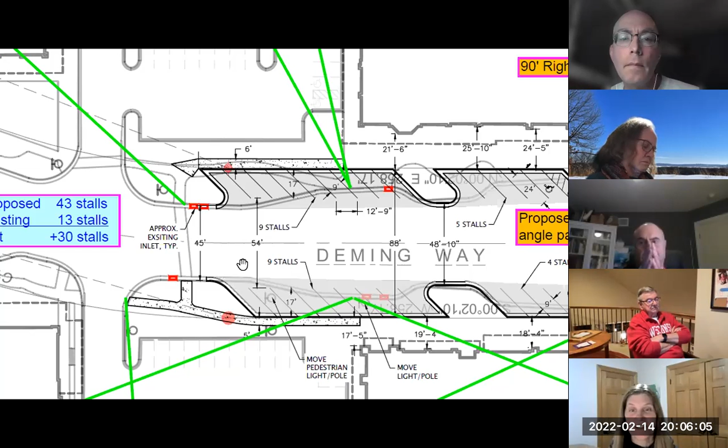This is Roxanne. I'll just say, I did not narrow Deming Way, but I think it's a great idea. I'm looking at Hilldale, and they have a 26-foot wide drive aisle with perpendicular parking, and I'm showing 54 feet, a huge area between the parking stalls on each side. If we narrow it up, I might be able to keep a lot of the infrastructure, which would save a lot of money too. I think it's a good idea.

Maybe. One thing, at these approaches, I think you'd still need 3 lanes, but that doesn't mean it has to be 50 feet. I see what you're saying too. Maybe we have to look at some of the stall movements near the intersections and look at that more closely.

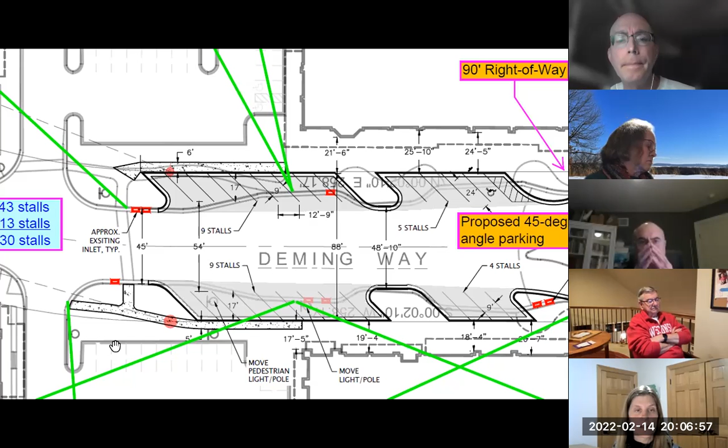This was Steve trying to get as many stalls as he can because he's trying to lease these. Well, yeah, so I tried to get what I thought was a reasonable amount while still keeping some decent views and angles, you know what I mean?

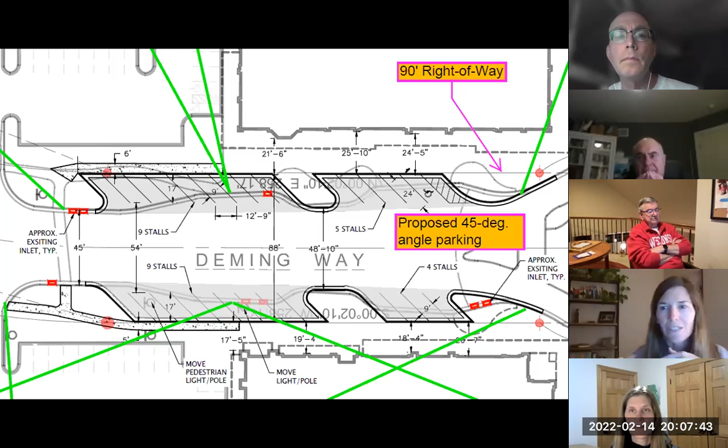One thing I wanted to comment is that although this is similar to Hilldale, it's a little different in that Deming Way connects to Greenway Boulevard. Like Hilldale is just connecting the parking lot to the other area, it's slightly different. So keep that in mind in terms of pedestrians and backing up and things like that. Hilldale is not like that.

What was that, Bob? I said the perpendicular parking at Hilldale is not on a through street, it's all internal to the shopping center. This is a street. Exactly. Frankly, I've driven both of these a lot, and Hilldale's got a lot more traffic than this does. A lot more. I agree.

The other thing is there's a bypass around, going down Deming, on the backside of the Hilton Garden Inn. So if people are really trying to race through here, they don't have to go through Deming to get out towards Greenway Boulevard. There's 2 ways. Kind of a roundabout way, but I understand what you said.

I was kind of looking at Elmwood and I just looked at the distance there. Looks to be about 34 feet. Again, I'm at 54 feet.

Yeah, I think we only left 16 feet in there for vehicle and bike use on each side. So I could see 32 or 34, something like that.

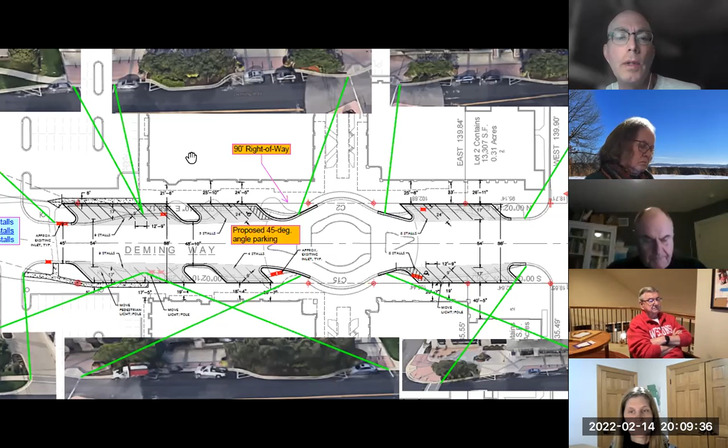And again, I think this is very different than Elmwood Avenue. But if the committee supports it, I was just suggesting this should at least go to the Plan Commission because it's going to change the character of what they originally envisioned with the development.

To focus really on this being sort of an outdoor walkable mall, and give a little more priority from the sidewalk to vehicle parking instead. I don't know, other than rough feel, what this might mean in terms of safety on this road with backing and pulling in with so much other visual stuff going on.

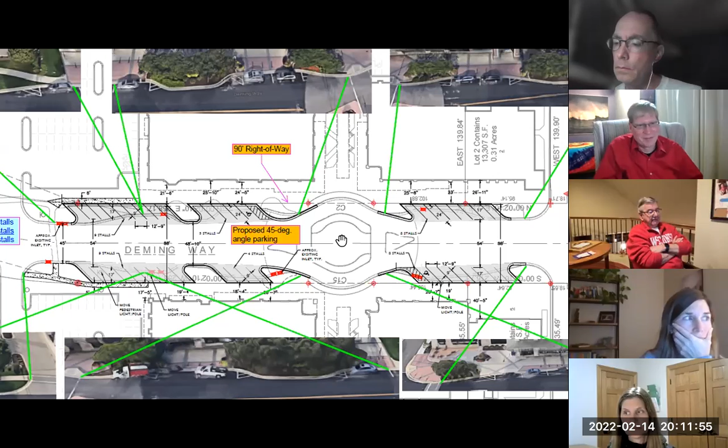Well, how would you like to proceed, committee? Do you want to refer this to the Plan Commission? I say yes, we should. All right, with our recommendation that they positively consider the angle parking.

Well, that's what you want to do, support the concept. Okay, I'd like to make a motion that we refer it to the Plan Commission with a recommendation that the angle parking concept be considered.

Can I ask a question, Carl, of your motion - does this all assume that this is going to be developer financed? All of the changes that need to be made in the roadway, the storm sewer system, if any, all of that stuff is going to be developer financed. Is that your understanding of the motion? Absolutely. Right, I think maybe we ought to state that in the motion as well. All right, I agree to add that to the motion.

And one other question, Sean, you had mentioned maybe that we'd need to consult with a traffic engineer. Is that something that the Plan Commission would do, or is that something that we would need to recommend?

I think it feels to me more like a Public Works Committee thing than a Plan Commission thing. So I think if you'd recommend that separately, or even in the same motion, doesn't really matter, but that would be something where the city would look for funding for that study or analysis anyway. Study's probably too fancy a word.

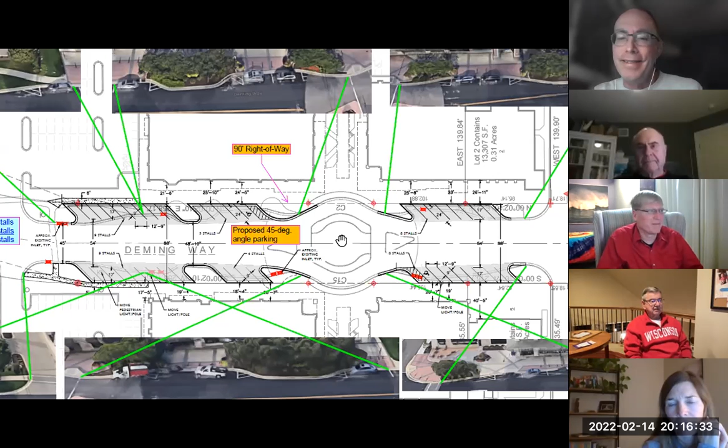So we don't have a lot left. Testing service agreements are up again. This is an annual thing where we engage generally 3 area soils exploration and material testing companies, so that when we get to construction of roadway projects, we have someone to call to make sure the concrete's right, the asphalt is right, and the base course is actually compacted well. Yeah, so we've done this before.

This is Robert, I'd recommend a motion to recommend to the Finance Committee and Common Council approval of annual testing service agreements with these 3 companies. Is there a second to Robert's motion? I'll second the motion. All right, motion's been made and seconded.

Under discussion, Sean, I would just ask, it indicates all firms have local offices and have done work for the city in the past. I assume the work that they have done for the city in the past has been satisfactory? Yeah.

All right, I have one question, Sean. There are a lot of these line items that are significantly different in price. How do you select which one of the 3 companies gets hired for any particular project, or is it whoever's available kind of thing?

It's a little of both. We normally have Sean Ulsrud, so each project manager talks to Sean Ulsrud because we do, to the degree we can, want to spread things out a little bit. But we try to figure out what's the major emphasis of any given project so he can say, let's hire Gestra for that one, or let's hire CGC for that one. So at least we can spread it around, and as best we can, we're trying to keep an eye on cost too.

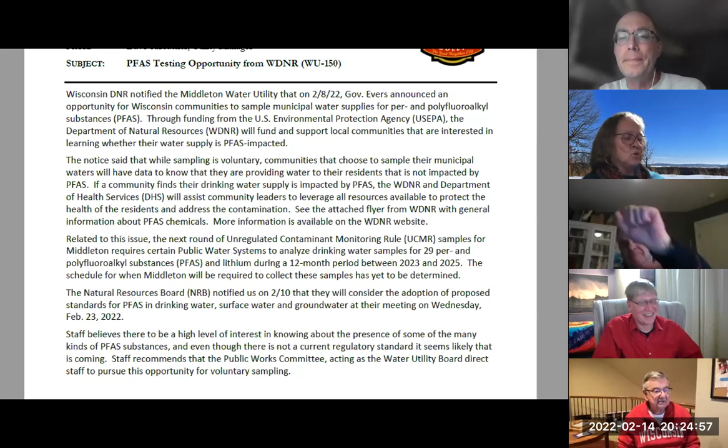That's okay, we'll soldier on. You guys go have fun, the rest of us have to be here though. Yep. Okay, have a good night, everyone. All right, good night. Bye all. Good night, everyone. Thank you.